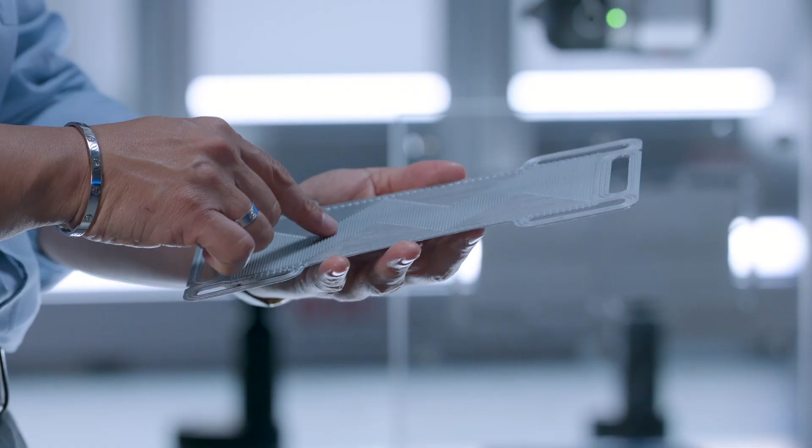Unlike the last episodes, in this one we will not primarily speak about product solutions or innovations. We will speak about what's behind this, about who's behind this. We will talk about Zeiss's most precious resource. We will talk about people, about the makers and the shakers, about innovators and creators, about people who put their hands on our products, about people in whose hands our solutions help to create great things. But we will not only speak about people, but also with people.

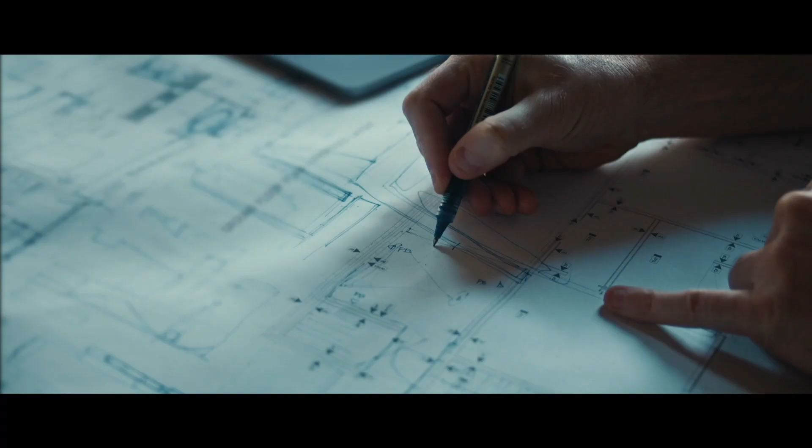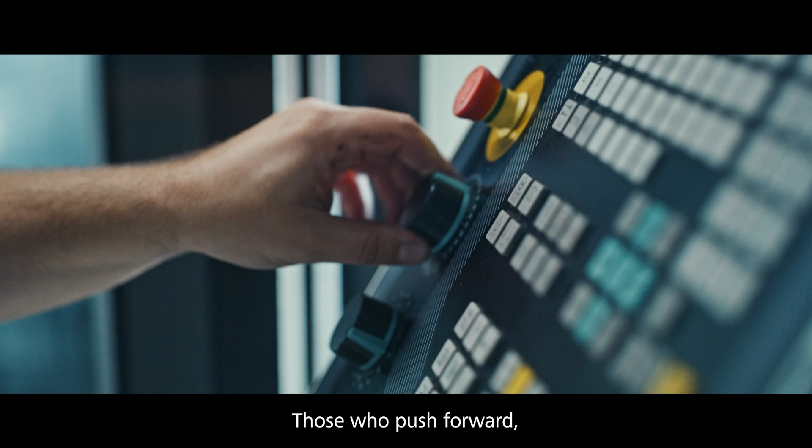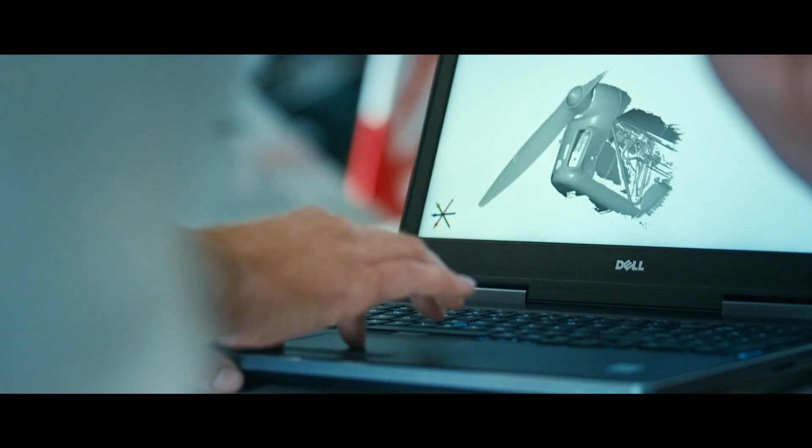We work for those who are making, creating, and inventing. Those who push forward, look for opportunities, take on challenges, and go the extra mile for quality. Wouldn't it be great to not only support them with our solutions, but to enable their strive for excellence and their success even further? To assist their everyday workflow and enable them to deliver mastery.

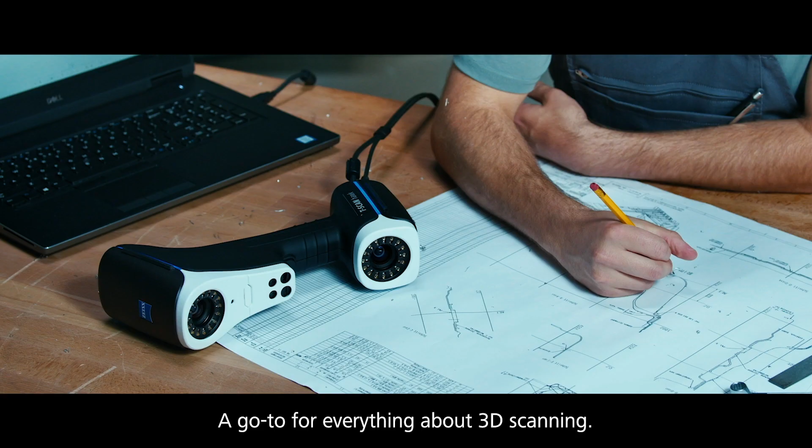Hands-on Metrology, the new home of 3D metrology. A hub for the visionaries and doers, the engineers, designers, and technicians. A go-to for everything about 3D scanning. Hands-on Metrology is the platform to get it done.

From useful getting started videos to helpful how-tos, it's about support, tips and tricks, and everything that enables people to do the best work possible. A place to learn and get inspired. A place to look for a solution. A place to see passion. Some might even call it obsession.

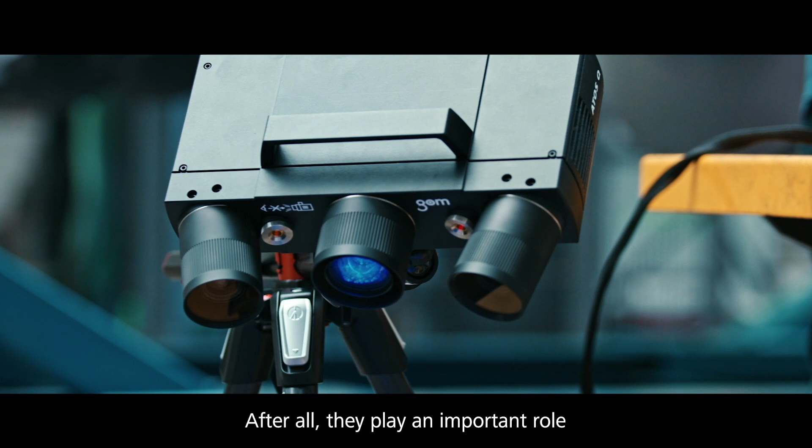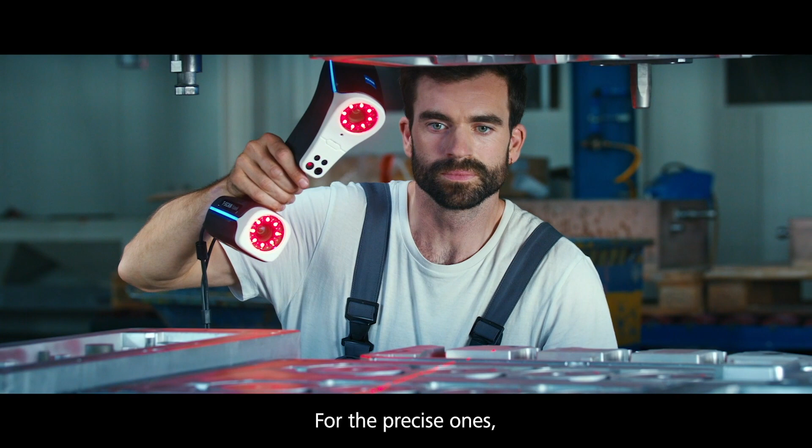And yes, it's the home for our technologies and solutions as well. After all, they play an important role in making 3D scanning and 3D inspection so fast and easy. Still, it is made for the makers and shakers, for the story and the glory, for the small pieces and the large ideas, for the precise ones, the driven ones, the crazy ones. It is made for you. Hands-on Metrology. Now online.

Okay, looks amazing, but what exactly have we been looking at? What exactly is Hands-on Metrology? So what we launched today is a new platform. We aim to be the home for all 3D scanning needs. Whether you're an expert or have never scanned before, Hands-on Metrology should be your go-to place for all your questions on 3D scanning, on information and inspiration.

So what we want Hands-on Metrology to be is a place for tips and tricks on 3D scanning, or to go deeper into specific products or applications. Hands-on Metrology, it's all about the makers and their challenges - those engineers, designers, technicians who grab our products and use them to simplify their workflows. We want to enable them to realize whatever crazy idea they have. We want to help them, we want to tell their stories. We understand why they love their job because we have the same passion for ours, and we want to tell their stories and be part of it.

Well, where there's passion, usually there's also success. But do these people actually have interesting stories to tell? Yes, for sure. When you ask one of our engineers what they do for work, you immediately see the sparkle in their eye, the commitment that they have for their job. And this is what we want to tell. We think there are a lot of stories and people out there.

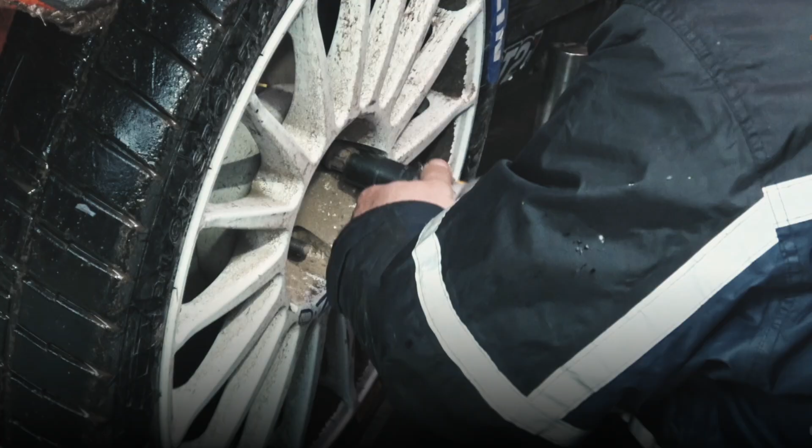Hi, my name is Martin. Welcome to BMA Autosport. At BMA, we build and prepare rally cars. We have two divisions: the modern rally cars, R5 type rally cars, and the historic rally cars, Porsche 911, and for now, starting with the Porsche 914.

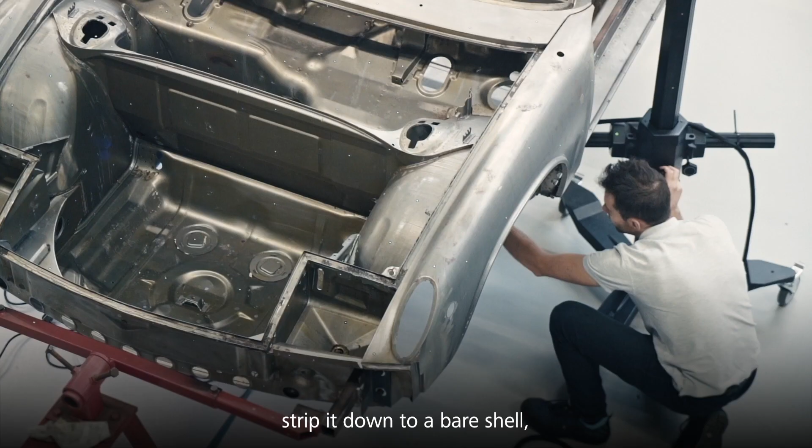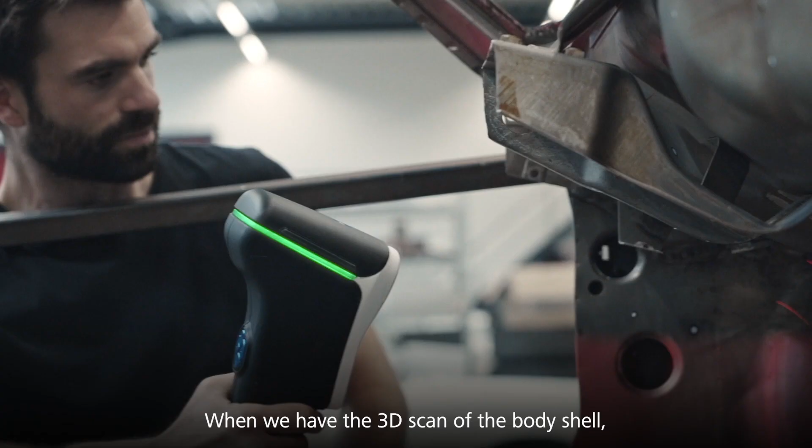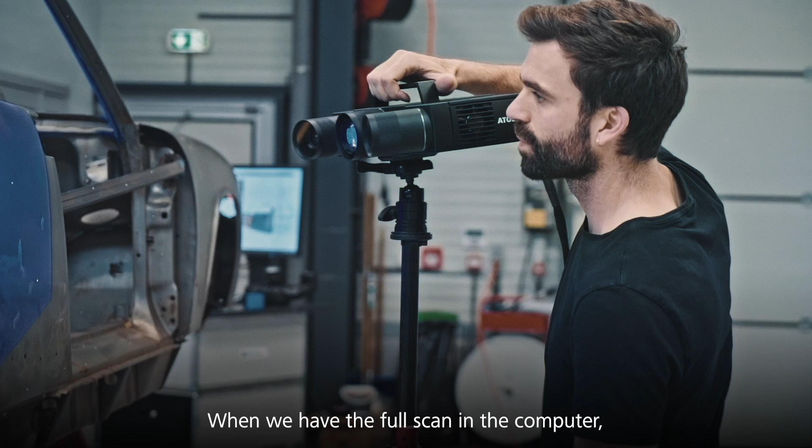Building a rally car means we take a street car, strip it down to a bare shell, and start building a rally car, reinforcing it. After that we redesign the part, trace it into our computer and make a 3D model from it. When we have the 3D scan of the body shell, we can start directly in the computer and design our parts straight away, have it machined, laser cut, and fit it straight to the body. When we have the full scan in the computer, we can design every part we want around it - suspension parts, external parts, whatever we want. In the future we still have the body and we can design straight away. Thank you for being here, and I hope to see you soon at the rally.

Well, that's what I would call a dream job. But we have seen some products in these videos, so let's talk a little bit about the applications and the technologies featured in these stories.

If we look at the market, there are very different applications. We have to measure or scan big parts, or be very portable, or measure a very complex part in a fast and easy way. For that, we have three different technologies: the Zeiss T-Scan Hawk, the Zeiss T-Scan, and the Atos Q. The nice thing about these technologies is that they all work on the same software platform, GOM Inspect Suite. This combination makes it a very useful tool for the 3D scanning market.

If we look at the T-Scan Hawk, it's a very portable system, but together with the pre-installed software, it gives you a real power tool to fulfill your needs. Please tell me, what exactly can it do, what exactly is it? So it's a very portable system, you can go on site to measure everything you want. So it is a completely portable 3D scanner, right? Yes, correct.

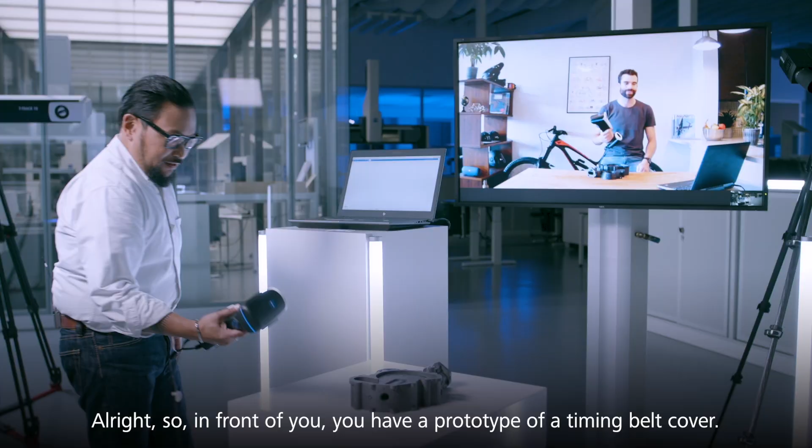So in front of you, you have a prototype of a timing belt cover. What we would like to do is make sure this is correctly made, so let's scan the complete part so we're able to inspect it and see if everything will fit. Of course, we can immediately start scanning the part, but with the T-Scan Hawk, we can even increase the accuracy if we capture the reference points before we start scanning. Okay, let's start with that.

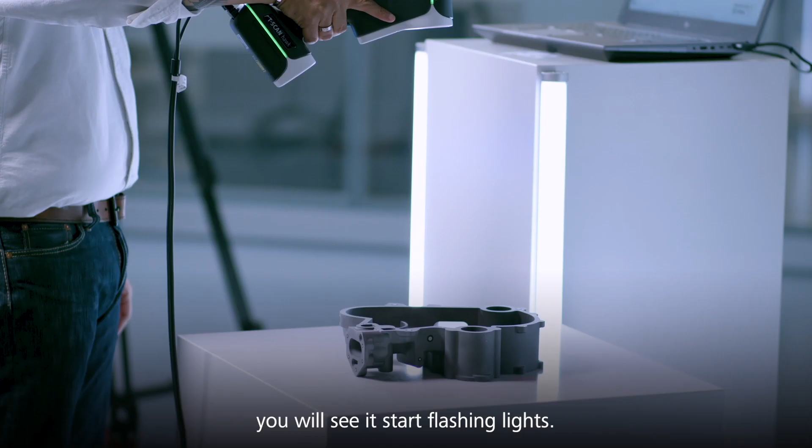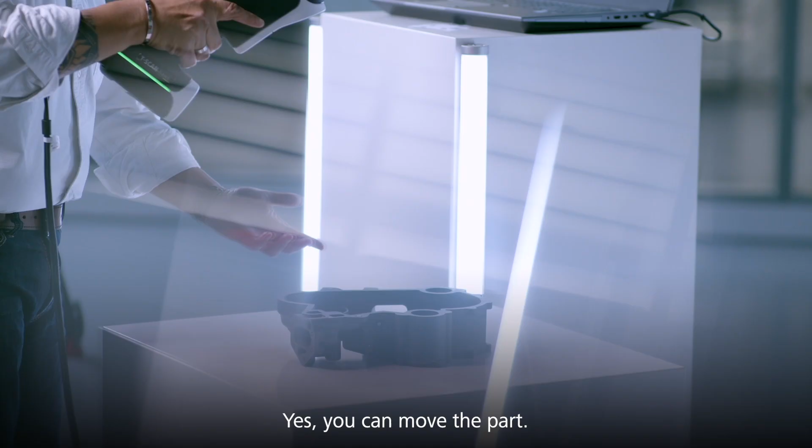In the software, you hit the first button, called Capture Reference Points. I'll do it with you. Just hit the play button on the back of the T-Scan Hawk and you'll see it start flashing light. Make sure you go around the part, a little from left to right. Can I move the part? Yes, you can move the part. There's no restrictions, no movement errors. It's perfectly portable and flexible.

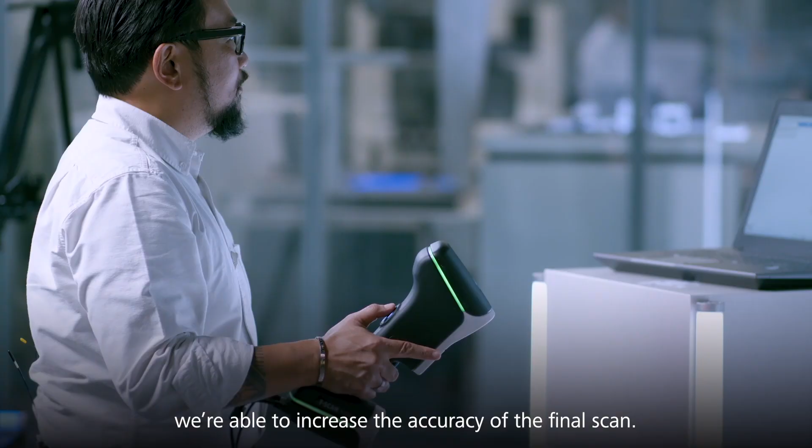Now that we've captured the reference points of the part, we're able to increase the accuracy of the final scan. The next step is defining the table, because we do not want scan data of the table. Yep, I have a background.

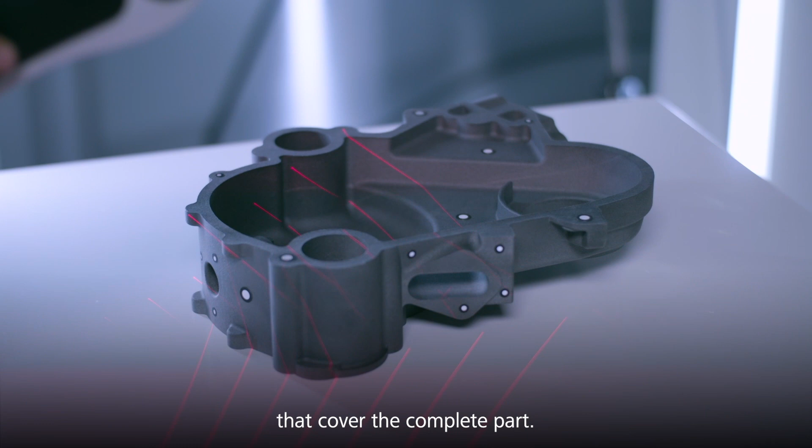Using the same remote control buttons, you don't need to go to the laptop, just the T-Scan Hawk in your hand. If we hit the play button, you see 14 laser lines oriented in crosses that cover the complete part. That's crazy. This is the default scanning mode of the T-Scan Hawk, which has a very large field of view, making it easy and fast to scan any surface. Okay, this is the default scanning mode.

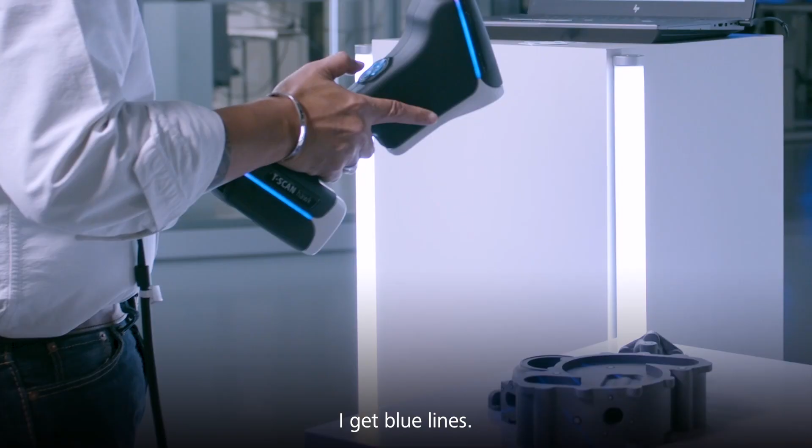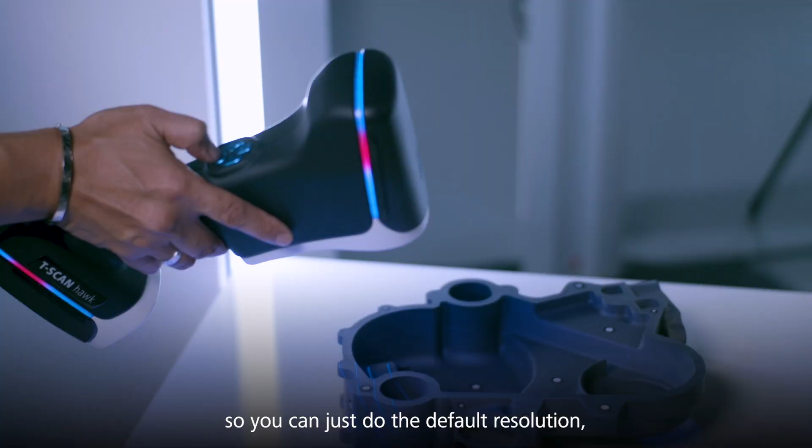Actually, the T-Scan Hawk has 3 different scanning modes. I'd like to invite you to double click the play button on the back side, and you'll see something happening. I got blue lines - suddenly you have 5 parallel blue lines. We'll use these blue lines for detailed scanning, where we can increase the resolution in certain predefined areas. So you can do the default resolution and then add local detail and resolution wherever you want, only where you want it, not everywhere. Exactly, in the same project without changing anything.

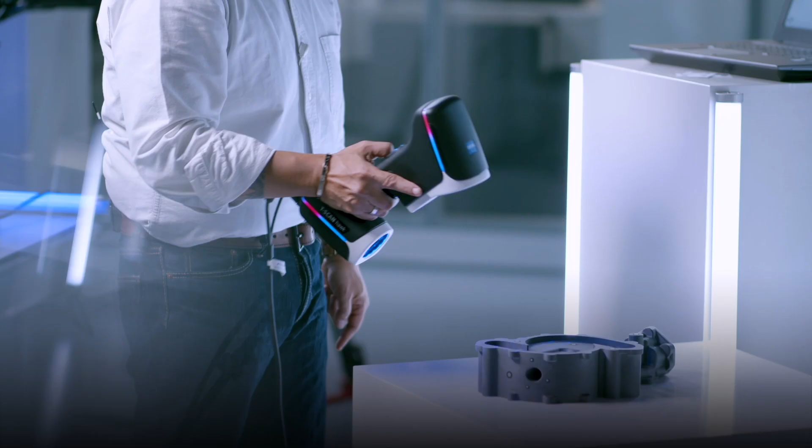Now, Toon, there's deep holes in here, and I don't have anything in there. Is there a way I can get in there? For default scanning modes, there's of course a limit in scanning deep pockets and hard to reach areas, but press that play button again twice. Got one line - so now you have a single red laser line, and this will help you scan deep inside pockets and hard to reach areas, specifically for what you asked. Look at that.

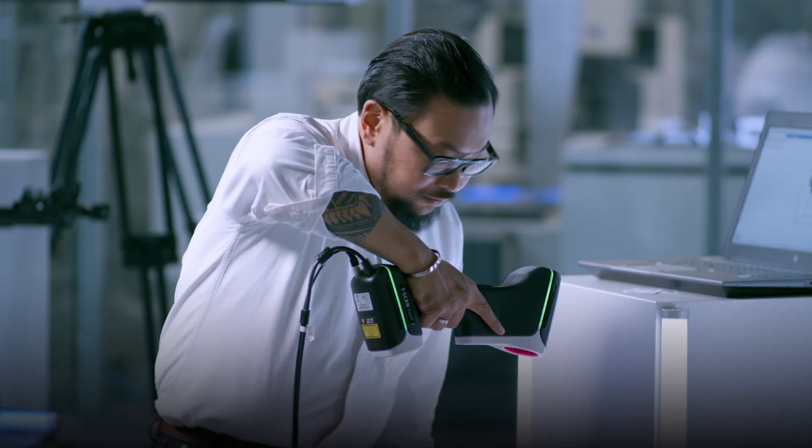Perfect, so 3 different scanning modes in one scanner. Pretty cool. And now the software will polygonize your measuring data and generate a complete digital copy of your part, which we'll be able to use to inspect and analyze.

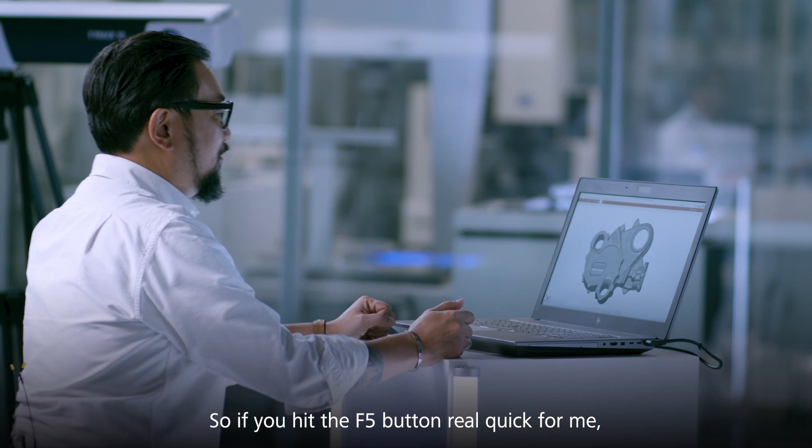What I didn't tell you is that you were actually scanning in a template with predefined inspections. If you hit the F5 button real quick, you'll see the presentation mode opens, and you'll have your inspections and report completely finished. This part that I just did is my inspection.

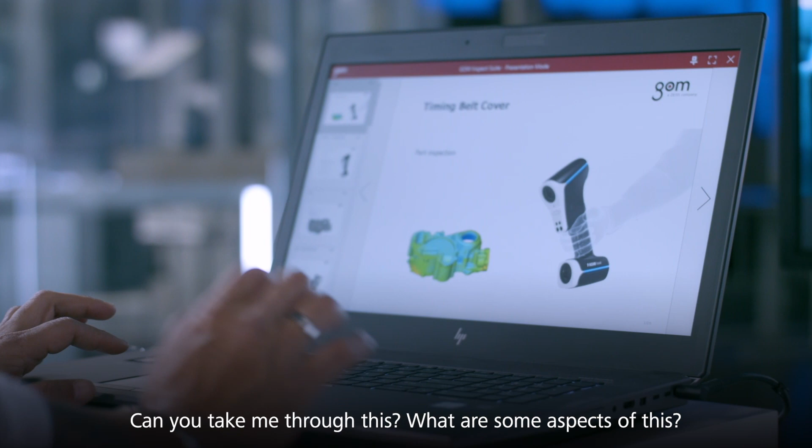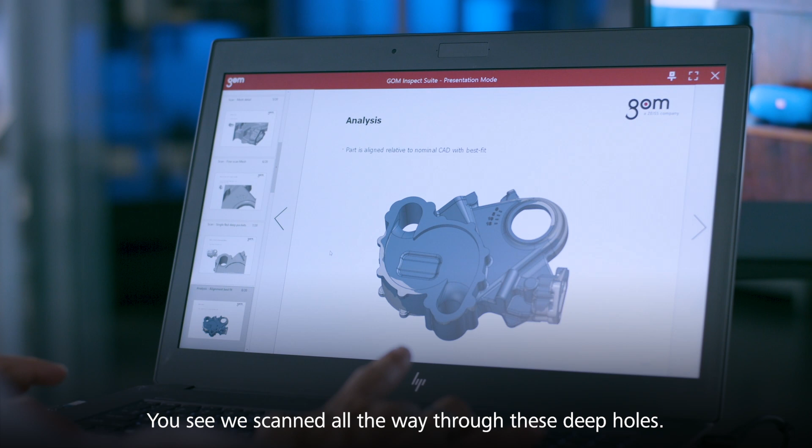I'm rolling down. You see we've scanned all the way through these deep holes. Those deep holes, that was really easy.

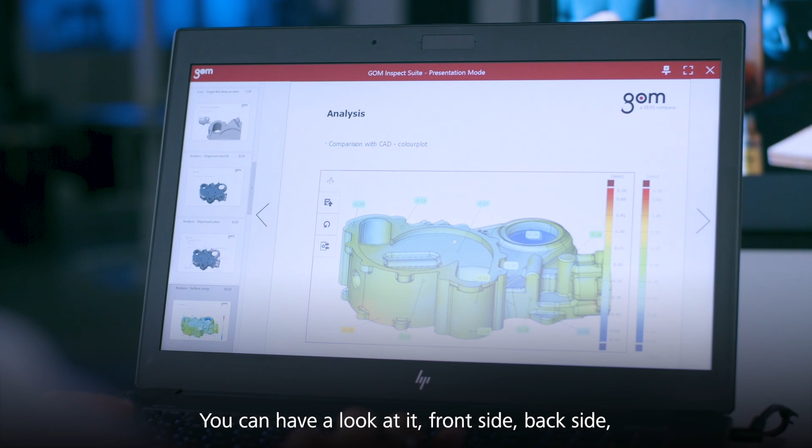I have a color plot here. We compared your part with the design file, the CAD, and you can even rotate it, use it as a 3D PDF. You can have a look at it, front side, back side. All the deviations are just there. Look at that, that's insane.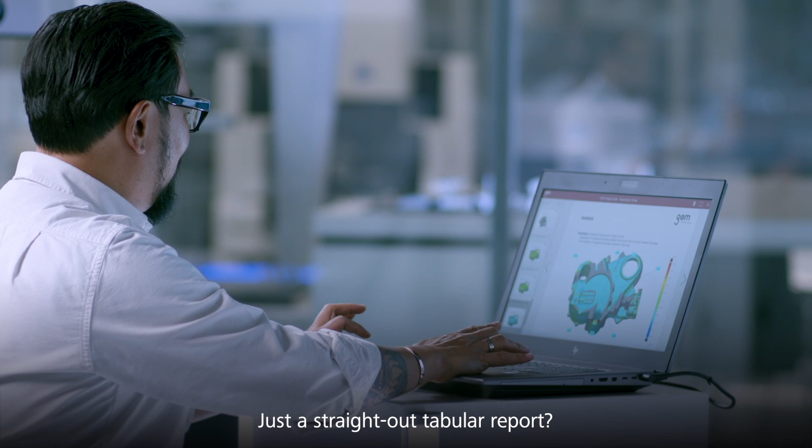If you go lower, you see some more 2D inspections, some GD&T inspections. What if I need a report? Just a straight out tabular report. The last page I also put in table format, which you can then export as CSV for whatever other reasons you would like. And here it is.

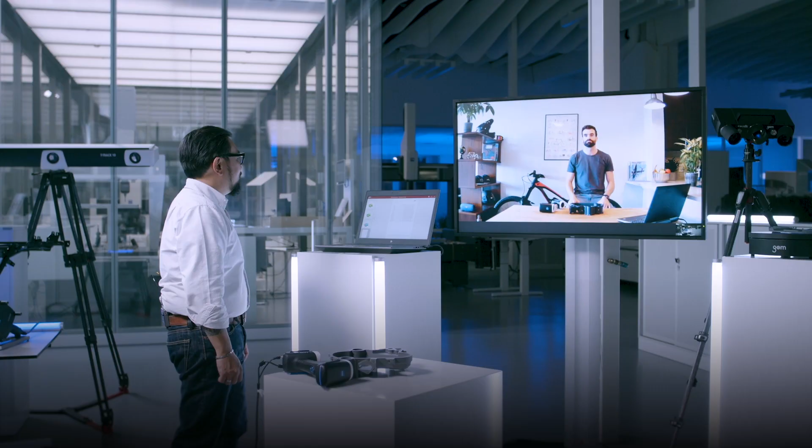So as simple as you need it or as robust as you need it. What I think I'm seeing here is that we have an extremely mobile, compact, easy to use piece of hardware coupled with very powerful information gathering software and reporting, all in one unit, ready to go, ready to measure, right? Exactly, all in one.